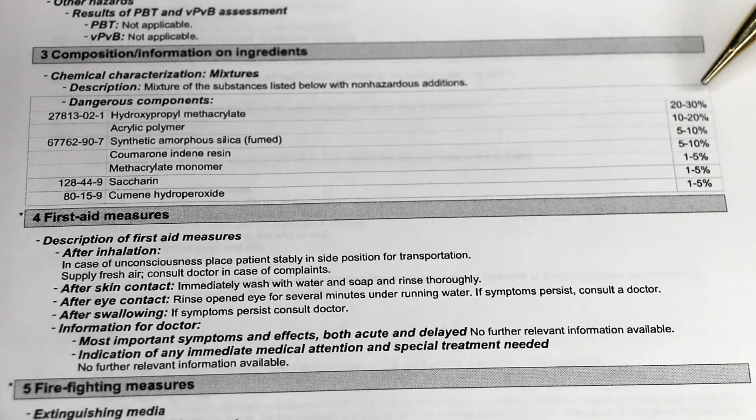I want to take a quick look at the safety data sheet for each of these products to see if any of them have the exact same ingredients, because when it comes to thread lockers, obviously ingredients matter. So the first one we're looking at is Vibra-Tite. I'm not going to read all the ingredients, just take a quick look at them. Okay, this is Pro Seal. It's much different than Vibra-Tite. I also want to point out the CAS numbers. If you ever have questions about any of the ingredients, you can look these CAS numbers up online and learn a lot more about the specific ingredients.

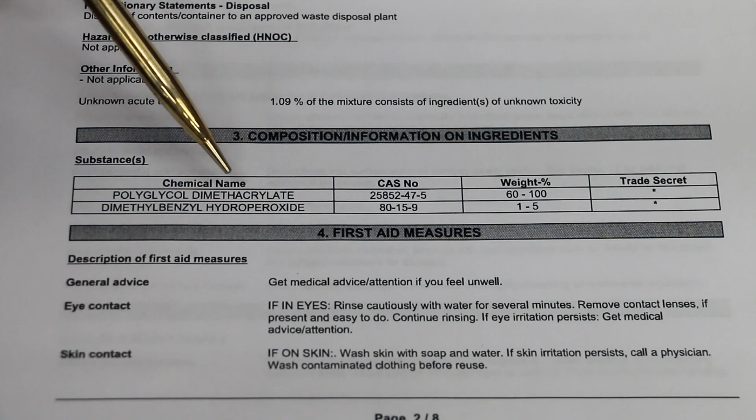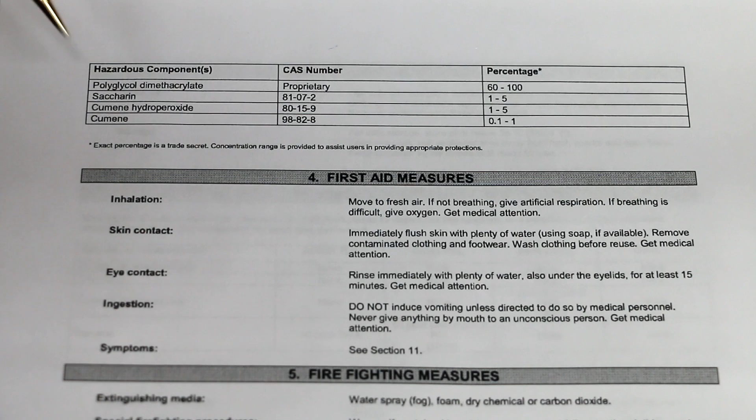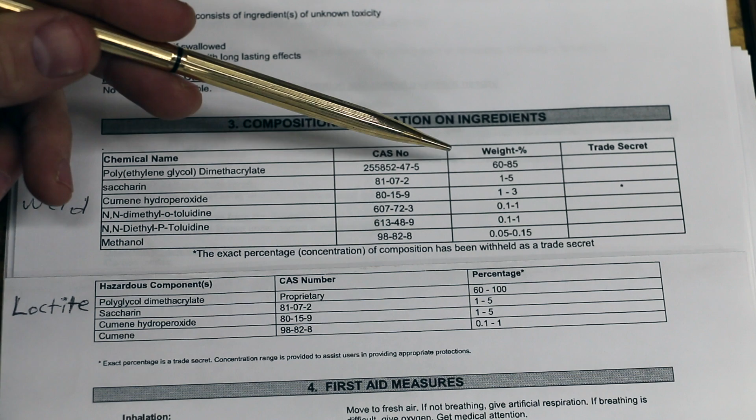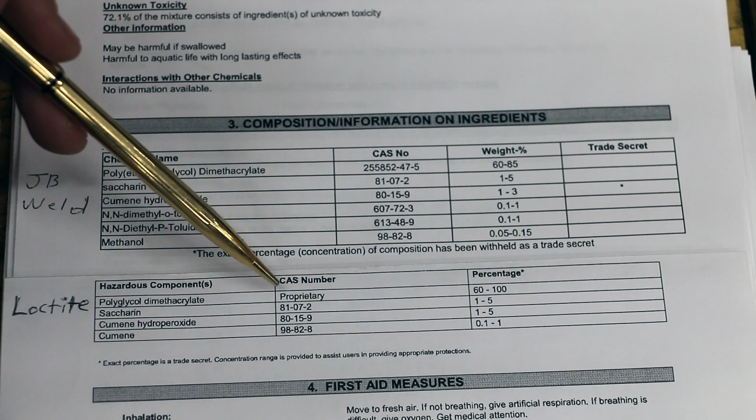Okay, this is Permatex. I find it very interesting that they only list 2 different ingredients. And the last one is Loctite. So again, each one of these seems to be a little bit different. The 2 closest together though include JB Weld and Loctite. Let's take a quick look at those 2. The 2 thread lockers with the most ingredients in common seem to be JB Weld and Loctite. However, as you'll notice, there is a different percentage regarding each of the ingredients, and it looks like JB Weld has a couple of other ingredients. Also, there is no CAS number provided for the first ingredient in the Loctite. It says it's proprietary.

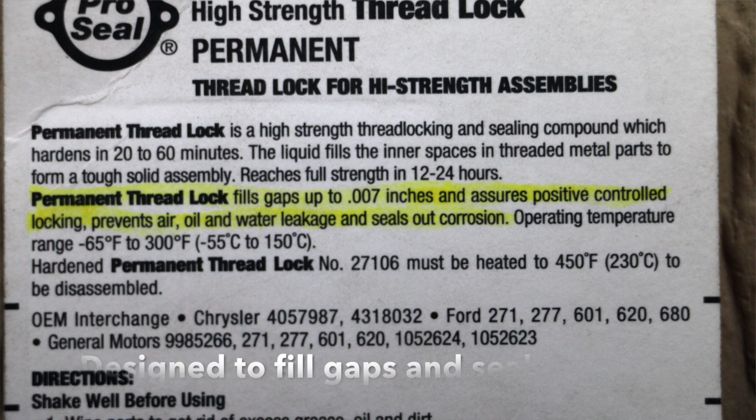So in some mechanical applications, you'll want to use a fastener without applying any sort of load to it. For example, if you have an assembly or a lever that needs to be able to move, you may want this nut to stay in place without having to apply a load so that you continue to have freedom of movement. So in the first application, we'll be applying the thread locker without applying a load. We'll be doing that for the first 2 bolts. The first bolt, we will not heat it up to 450 degrees Fahrenheit. The second bolt, we will heat it up after it's had a chance to cure to see if it breaks down under heat.

One thing I want to mention today, when I apply these thread lockers between applications, I'll change out my gloves because I don't want to cross-contaminate. Also, I'll be trying to apply just 1 drop. Now, Vibra-Tite is a gel, so it's going to be very difficult to determine exactly how much I'm adding as far as a drop, but I'll do the best I can to make sure I'm just adding 1 drop. So anytime you're using a product that has a mixture of ingredients, it's always important to shake it before using it just to make sure it thoroughly mixes.

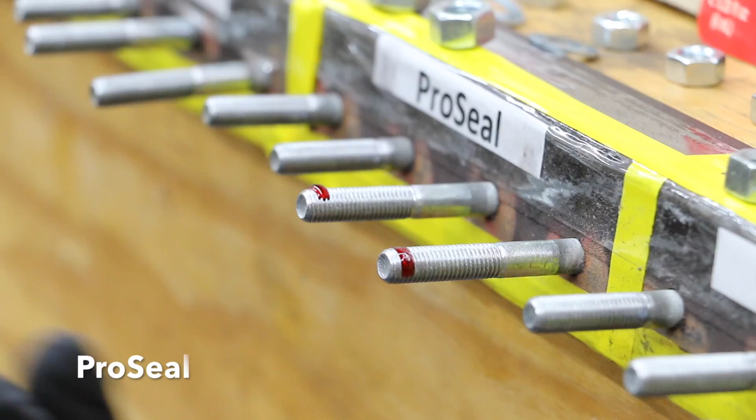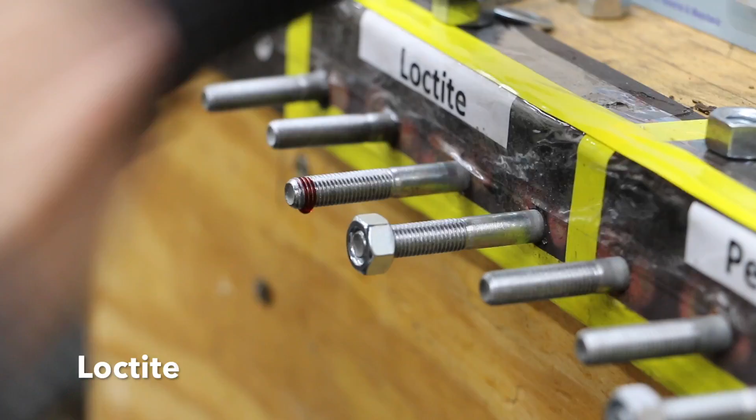We're going to apply a load to these 2 bolts. I'm going to use 2 oversized nuts, and then I'm going to apply a washer. If some of the thread locker ends up on the washer, it shouldn't be a problem because the washer is not attached to the nut and it will move freely. I'm going to apply 50 inch-pounds of torque to each one of these nuts.

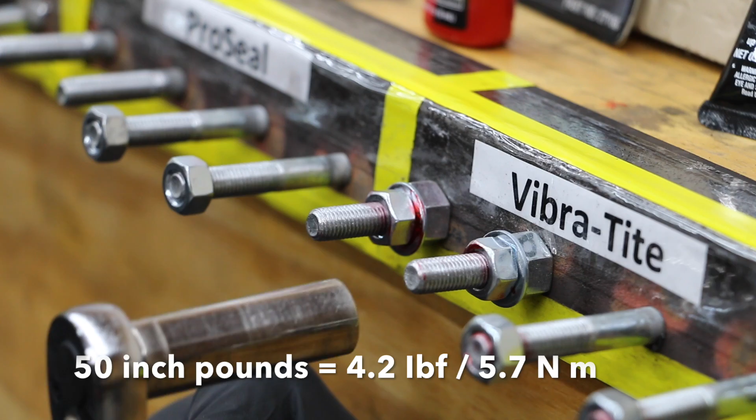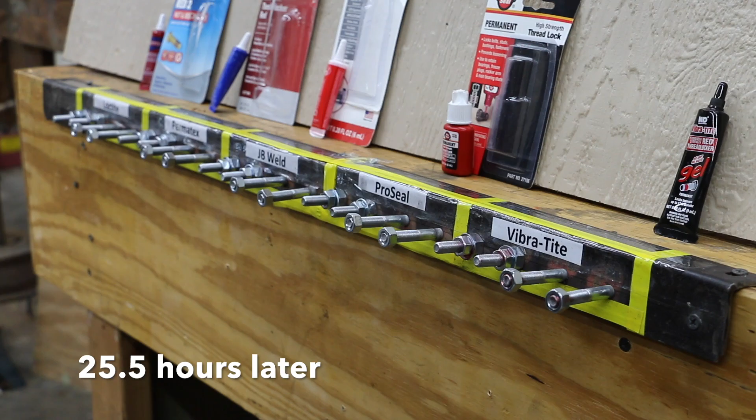It's actually been 25.5 hours since I applied the thread lockers, so all these thread lockers should be fully cured. So now we're going to go ahead and begin testing. I'll be using a different method to measure torque than I've used in the past.

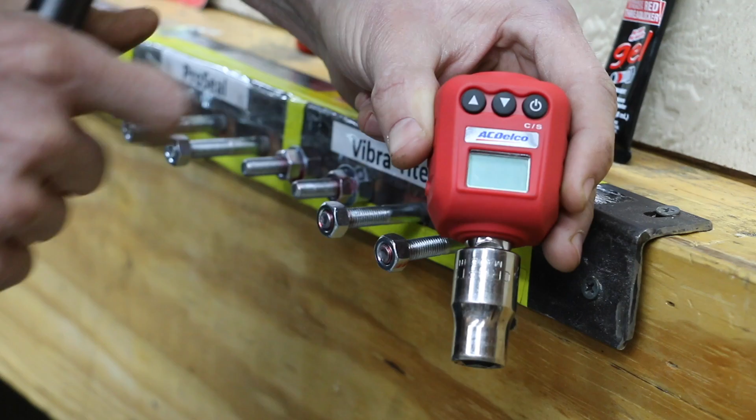Several of you have asked me to use this specific type of torque adapter that goes on the end of a wrench, and the way this works is whether I'm tightening or loosening a bolt, this will record the highest amount of torque that's being applied. I've never used one of these before, so this is new for me. This will be quite interesting to see how this works. If this thing starts messing up though, we'll go back to the traditional torque wrench.

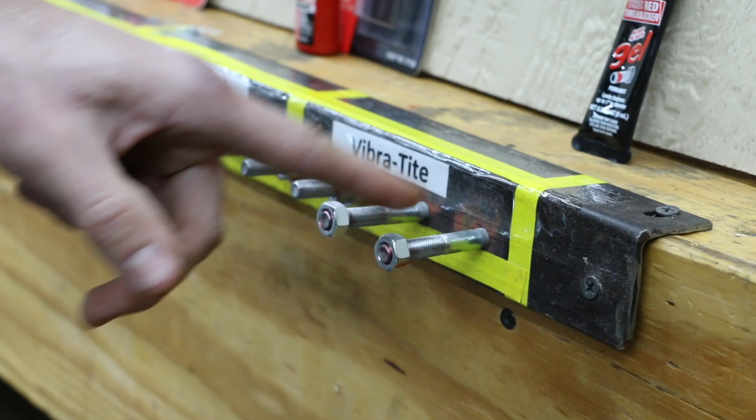So we're going to start with Vibra-Tite, and all I'm going to do is apply force to the first bolt to loosen it. And we're going to take a measurement of how much force it takes. And remember, this is no load. After we do that for each of them, then we'll move on to the third bolt, and again, measure how much torque it takes to break loose a bolt that has been torqued to 50 inch-pounds.

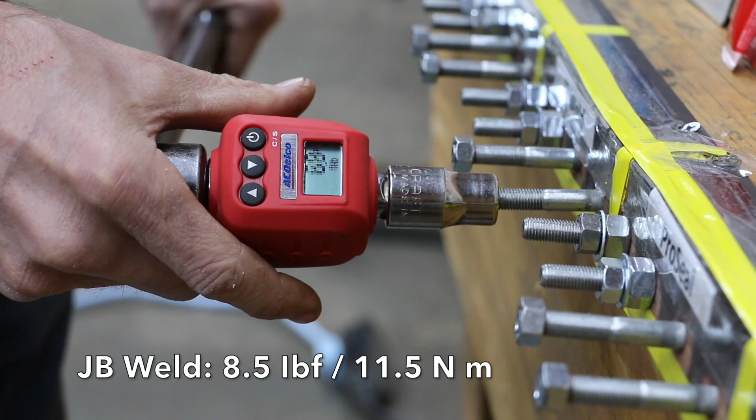Okay, now I'll be testing the load, and I have tightened this to 50 inch-pounds of torque. So this is, again, this is loaded. So we'll see how much torque it takes for each one of these to break free.

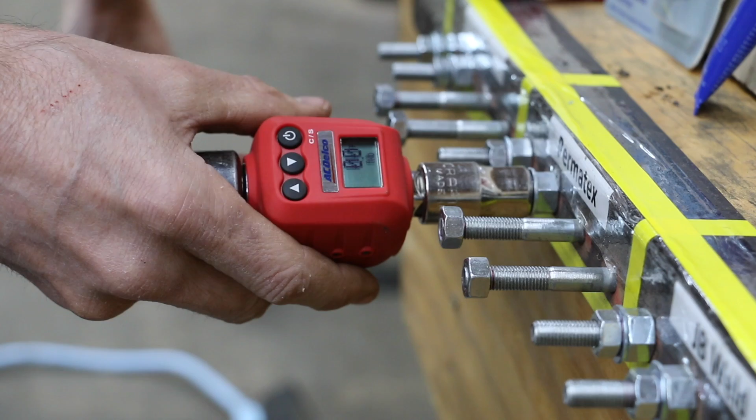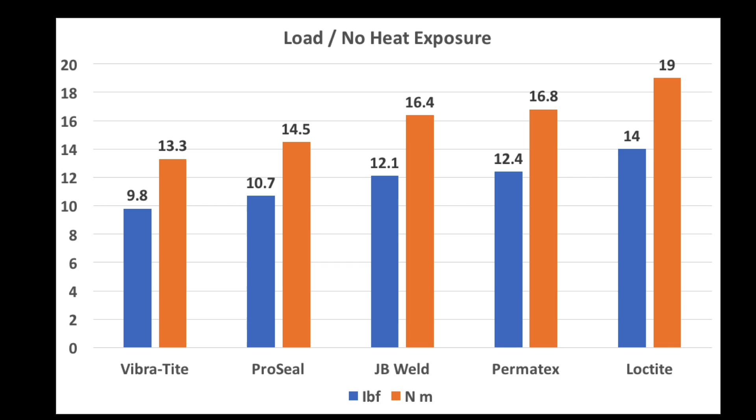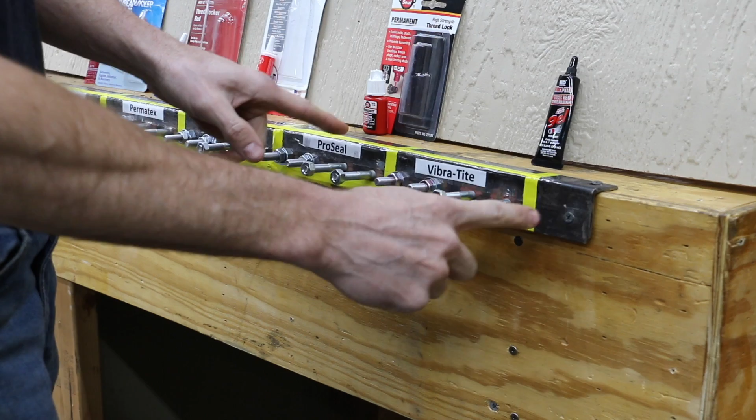Okay, so we just finished testing the no load and the load for this steel that has not been heated. So what we're going to do now is we're going to actually heat this steel up to 300 degrees Fahrenheit to test the max temperature range to see if it affects in a negative way the ability of these thread lockers to hold tension.

So I went ahead prior to doing the video, and this piece of steel is already cut into two different pieces. So all I'm going to do is go ahead and remove this piece as well as this piece so it'll fit inside of an oven. And we're going to go ahead and heat this up.

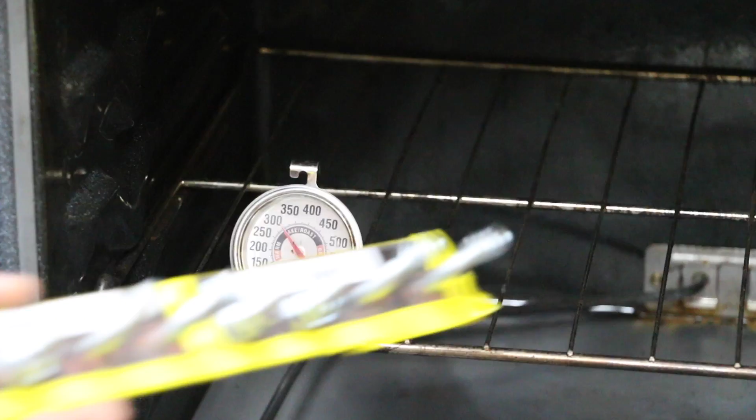Okay, so fortunately we have an oven to do some testing with. So the first thing I want to do is make sure that the oven is at 300 degrees Fahrenheit and not a bit warmer, because that's what these products are rated for. Okay, it's right at 300 degrees inside the oven. So what I'm going to do is put both of these thread lockers inside the oven.

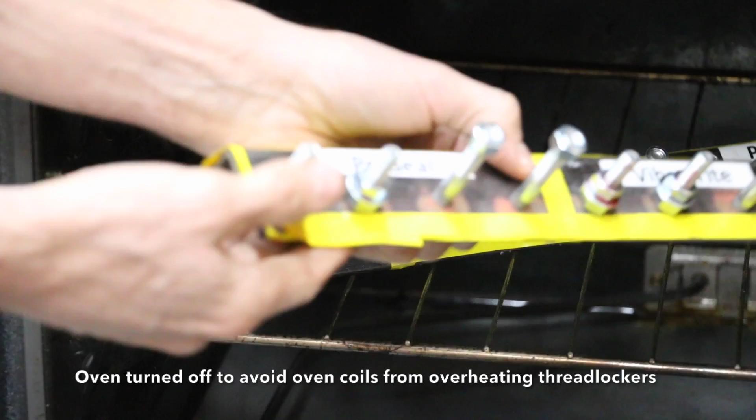I turned the oven off because I don't want the radiant heaters to cause the metal to actually heat up above 300 degrees Fahrenheit. Okay, an hour has passed. I'm going to go ahead and take the metal out.

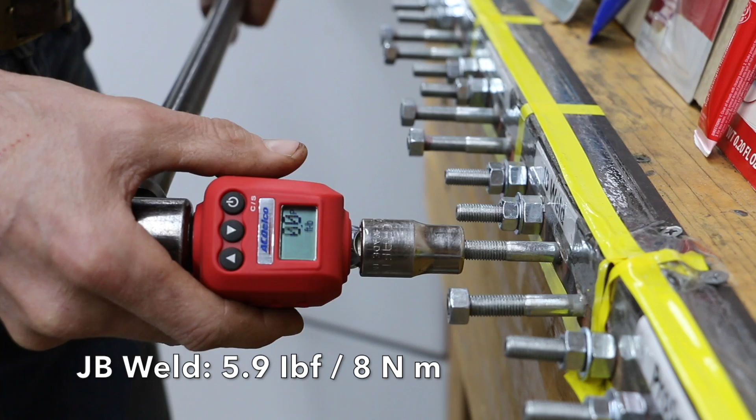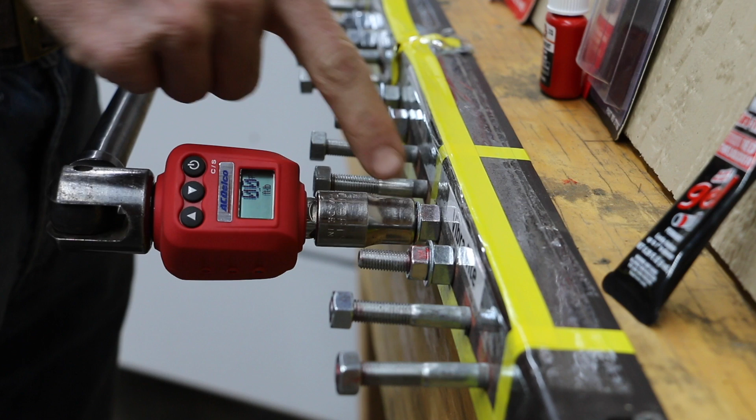Okay, now we're going to do the bolts that have been tightened to 50 inch-pounds of torque. And again, this is a foot-pounds measurement. These bolts have also been heated.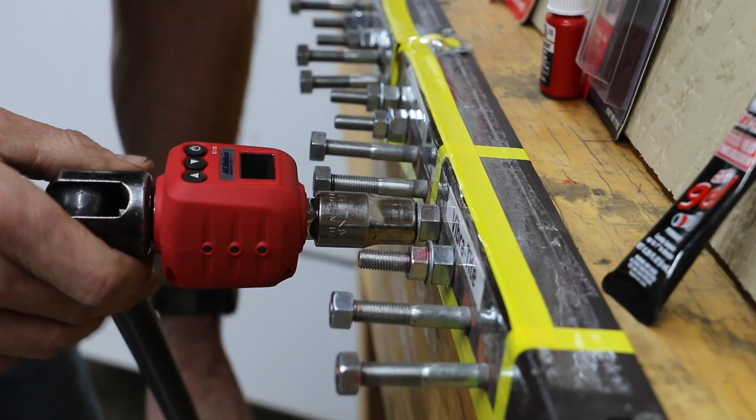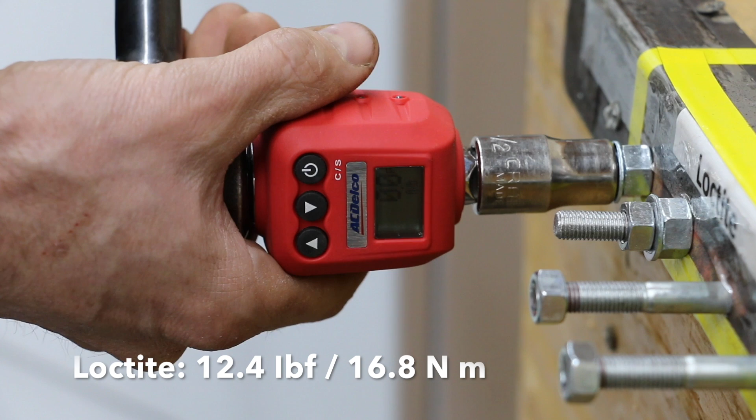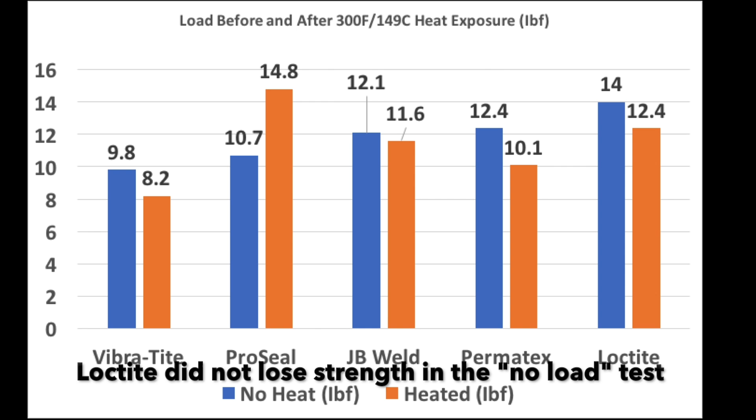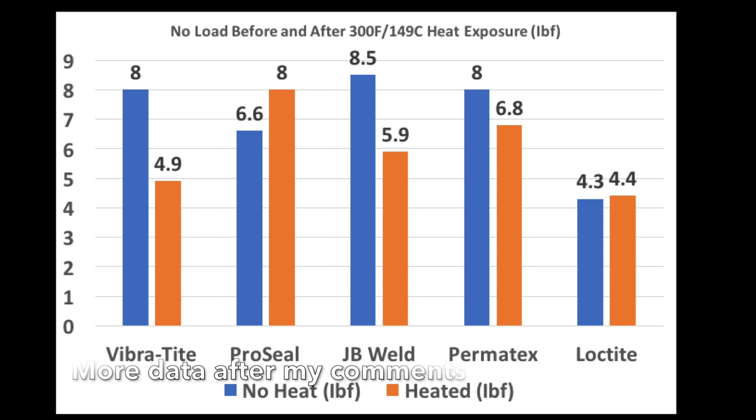So when it comes to thread lockers, name brand makes a pretty big difference. All the thread lockers lost strength when exposed to heat except for ProSeal. ProSeal actually gained strength. Finally, Loctite did not seem to have a lot of strength as far as the no load condition, either before or after exposed to heat. So if you need a thread locker for a no load condition, Loctite might not be the best one to choose.